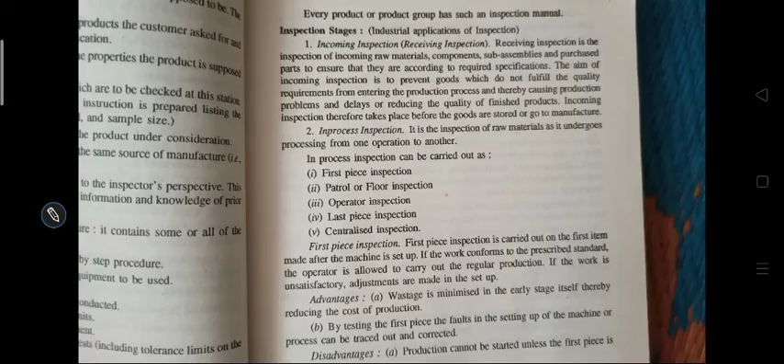Now we discuss inspection stages, that is, industrial application of inspection. The first point is incoming inspection, that is, receiving inspection.

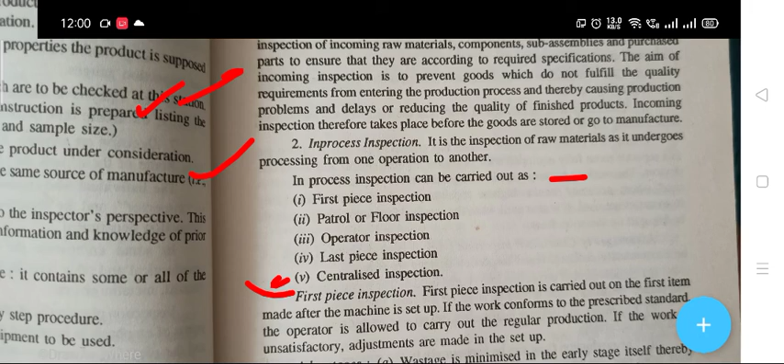There are further advantages: wastage is minimized in the early stage itself, thereby reducing the cost of production.

By testing the first piece, the faults in setting up the machine or process can be traced out and corrected. The disadvantage is that production cannot be started unless the first piece is inspected. Men and machines may remain idle for want of first piece inspection.

Next, floor, patrol or roving inspection. Under the floor inspection system, quality is checked at the machine or at the floor. The inspector walks around on the shop floor from machine to machine and checks samples of the work of various workers. What are the advantages of floor inspection?

Floor inspection is particularly suitable when the products manufactured are heavy and when the individual inspection stations can be effectively integrated with line production. Handling of material is reduced, it saves time, waiting for inspection and clearance is reduced, the line layout of machinery need not be disturbed, defects may be quickly discovered and corrected, it helps catch errors during the process, and avoids further working on defective products.

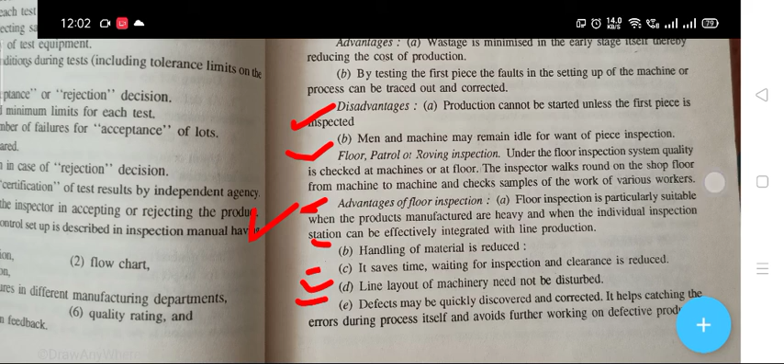And what are the disadvantages? Then there is centralized inspection. Under this system, inspection is carried out in a separate room, fully equipped with all measuring instruments or inspection devices. The particular work is transported to the inspection station. It is used where accuracy requirements are highest and precision measuring instruments are used. It is also used when the required inspection device cannot be brought on the shop floor.

Then what are the advantages of centralized inspection? First, a large quantity of work can be economically checked, fewer inspection devices are required. Second, subdivision of inspection into simple tasks makes it possible to employ less skilled inspectors than would be required for floor inspection. Further, expensive or delicate instruments can receive proper care and can be used more accurately.

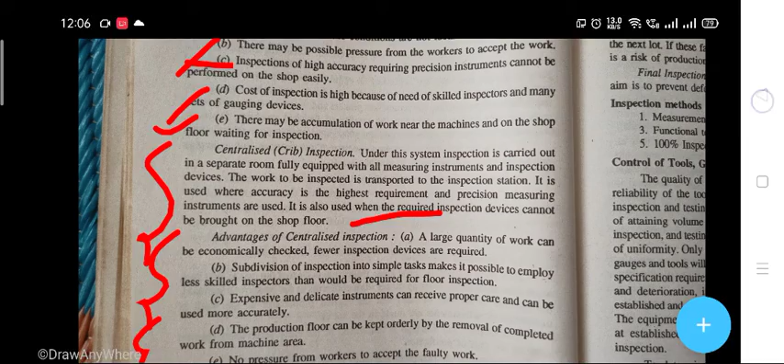Further, the production floor can be kept orderly by removal of completed work from the machine area, and there is no pressure from workers to accept faulty work. There is better control of quality due to more accurate inspection, as the inspection room is away from the shop floor, and supervision of inspection work is possible. Inspection using all the required precision measuring instruments and inspection devices is possible.

What are the disadvantages? A large amount of spoiled work may accumulate before the defect is corrected at the machine, and handling of material and total processing time is increased.

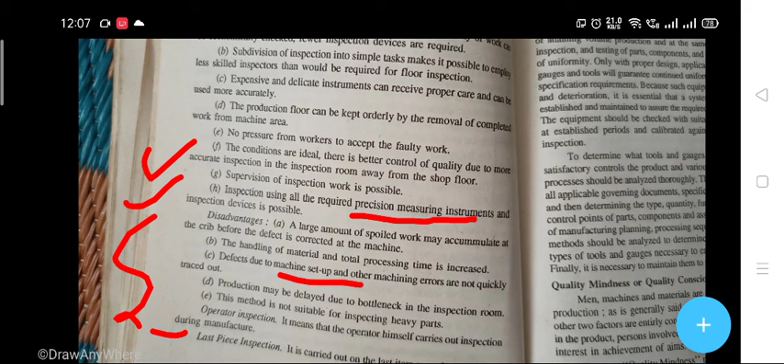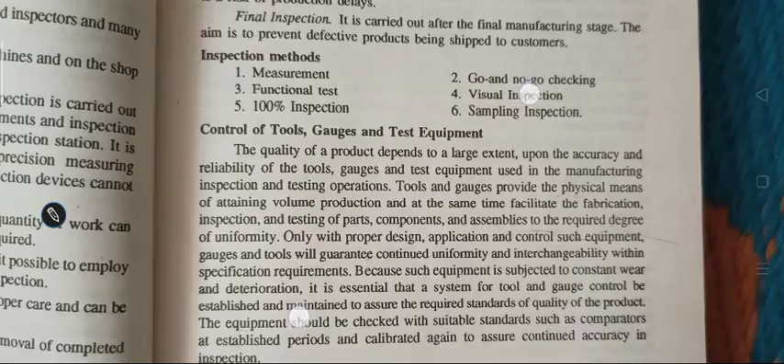If these faults are not detected when the next work is started, there is a risk of production delay. Then what is final inspection? It is carried out after the final manufacturing stage, and its aim is to prevent defective products being shipped to the customer.

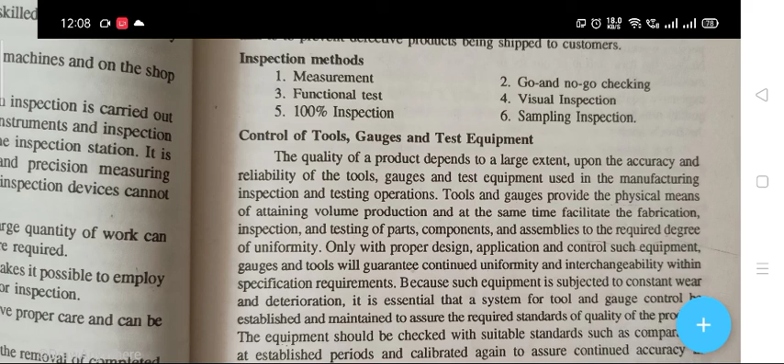Visual inspection, 100% inspection and sampling inspection.